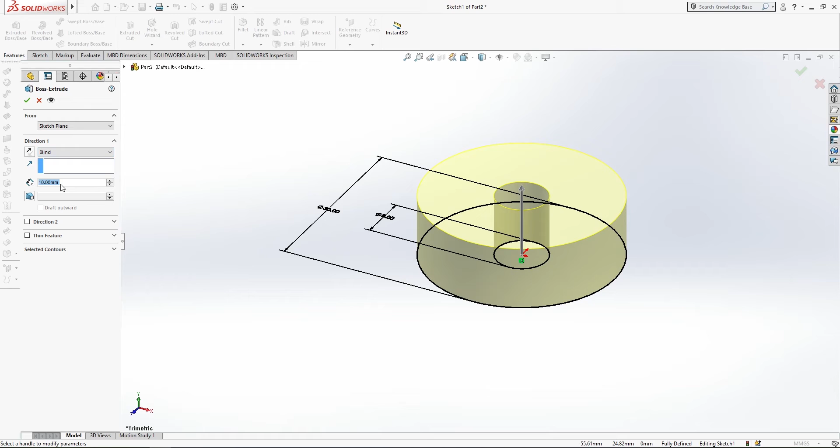And then go to features and select the boss extrude and extrude the sketch into 10 mm. And now we are done with our base.

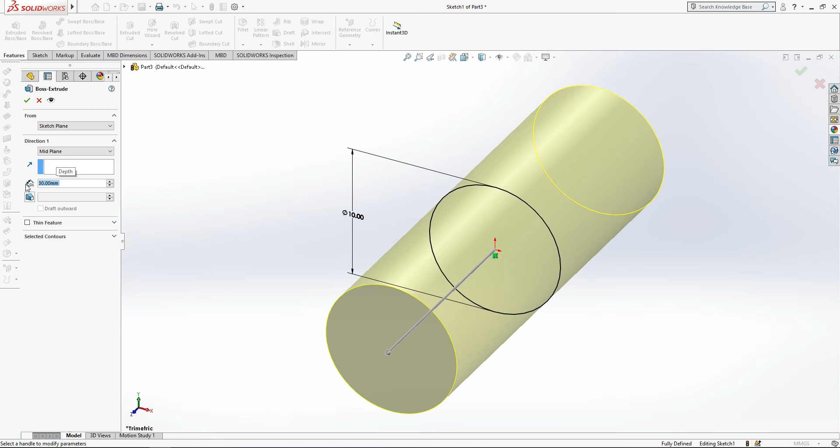Next, we are going to do the cam shaft. Select the front plane, sketch, and create a circle with a diameter of 10 mm. Now, go to features, select the boss extrude, choose the mid plane, and extrude by 30 mm. Now we are done with our camshaft.

Now we are going to do the spring. Select the front plane and create a line upwards with the length of 23 mm.

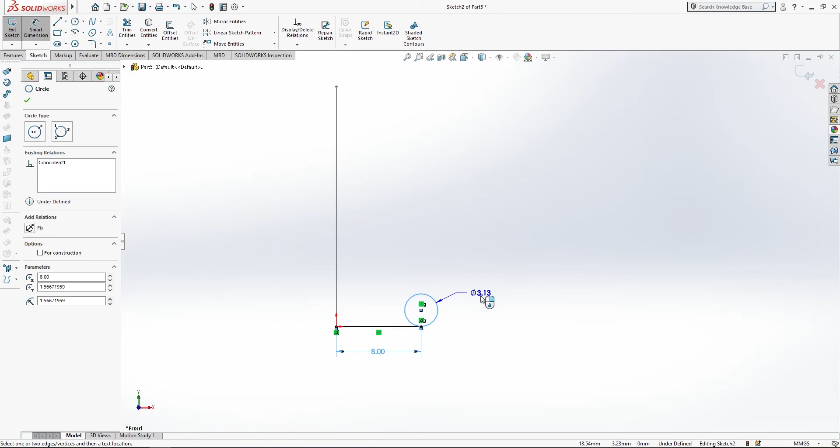Now exit the sketch and select the front plane again and draw a small circle and create a line connecting from the center to the center of the circle. And then add relation, choose the horizontal. We have the dimension of 8 mm for the line and 2.5 mm diameter for the circle. Exit the sketch again.

Select the sketch 2. Go to features, select the sweep boss. For the path, select the line. Make sure that the circle is closed looped. Go to options. Choose the twist value and then revolution and the direction of 4. And now we are done with our spring.

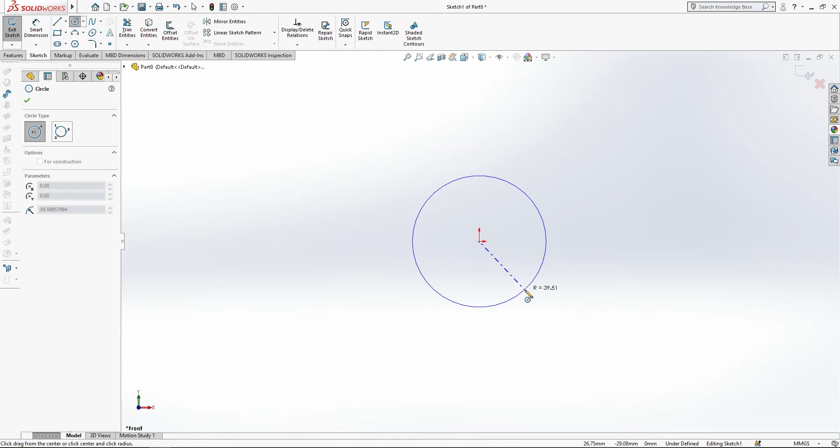For our next part, we're going to do the cam body. Select the front plane, then create a circle with a diameter of 30 mm and another circle inside with a diameter of 10 mm. Then select the center line. Then from the center, create a line upwards with a length of 30 mm. And then draw a circle at the end of the line with a diameter of 12 mm.

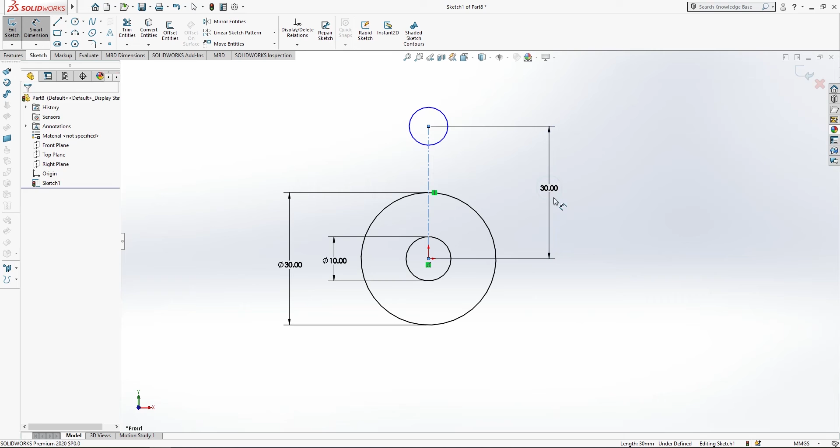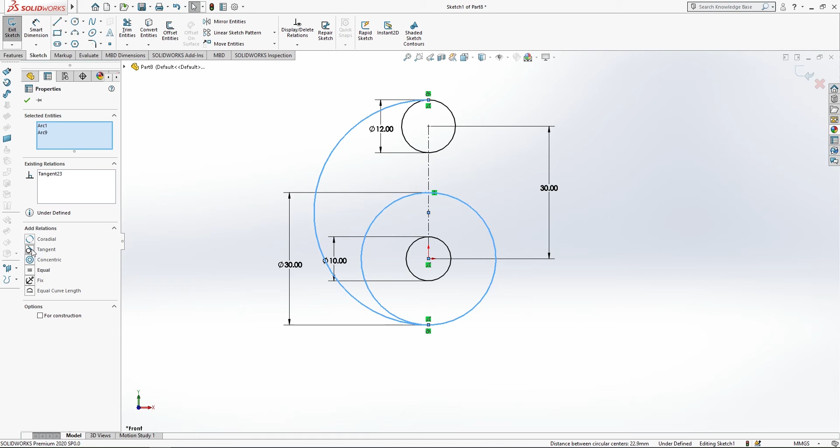Now, choose the 3-point arc and select this circle to this circle and adjust its arc. After that, make the arc and the circle tangent. We can adjust the arc like an egg.

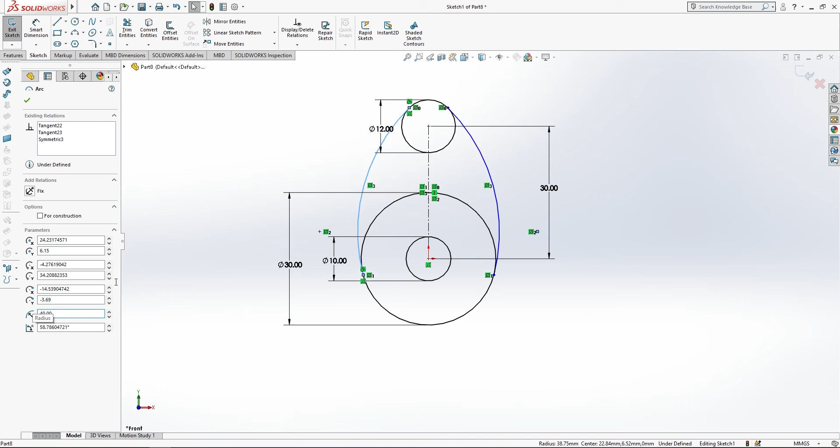And then select the mirror entities and mirror the arc, adjust it, let's say 40, and then trim the circle inside. Now go to Features, select the Boss Extrude, choose the mid-plane, and extrude by 10 mm.

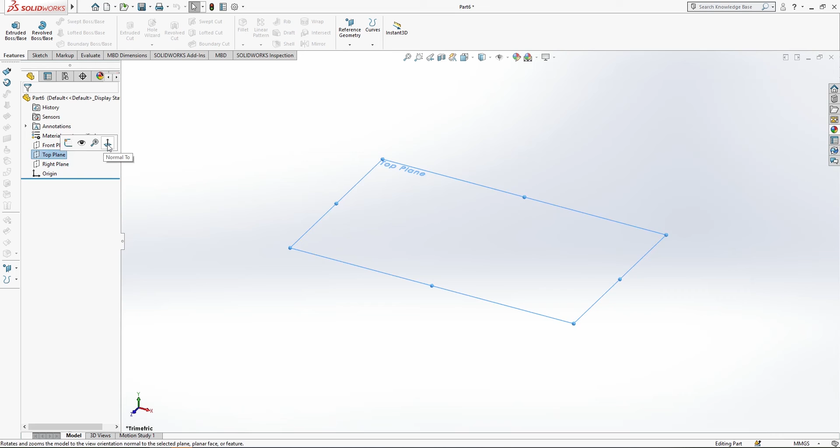Now for our last part, we're going to do the cam piston. Select the top plane, draw a circle with a diameter of 8 mm. Go to Features, select the Boss Extrude and extrude by 50 mm.

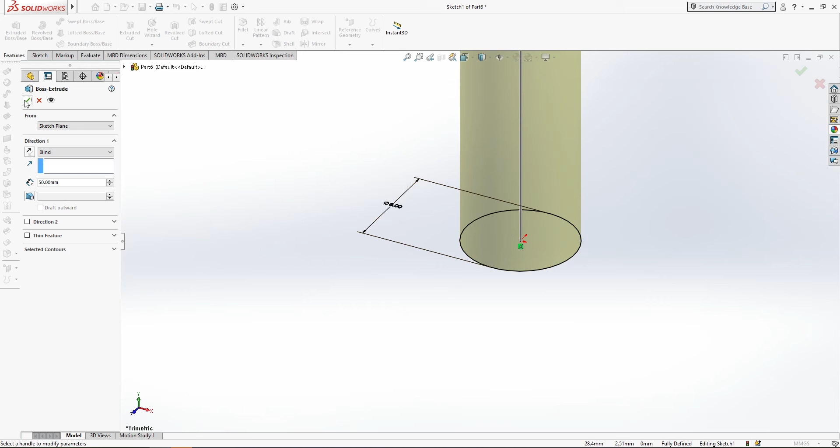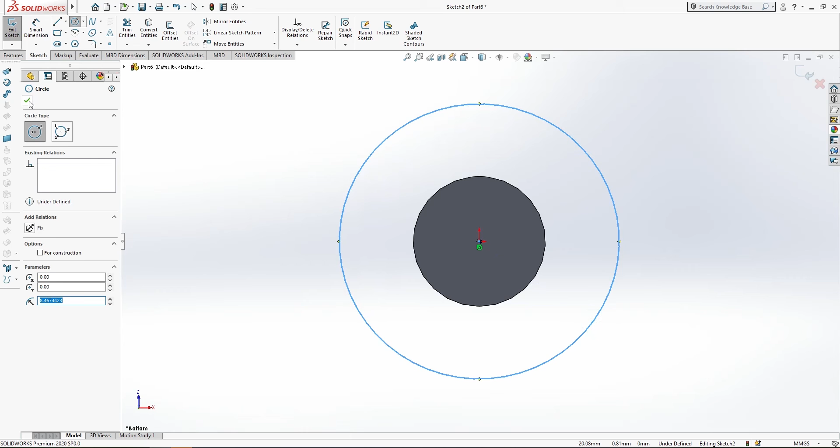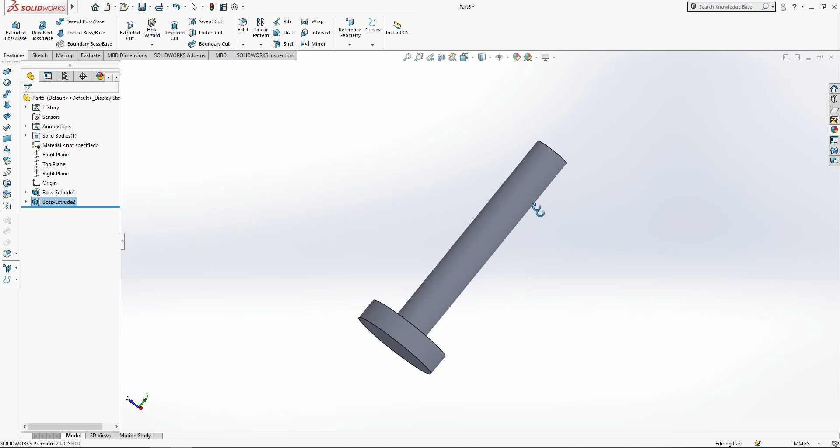After that, select the lower part or the base, and then sketch. Draw a circle with the diameter of 20 mm. Now go to Features again and Boss Extrude and extrude by 5 mm downwards. Select the fillet and fillet the lower part by 2.5 mm.

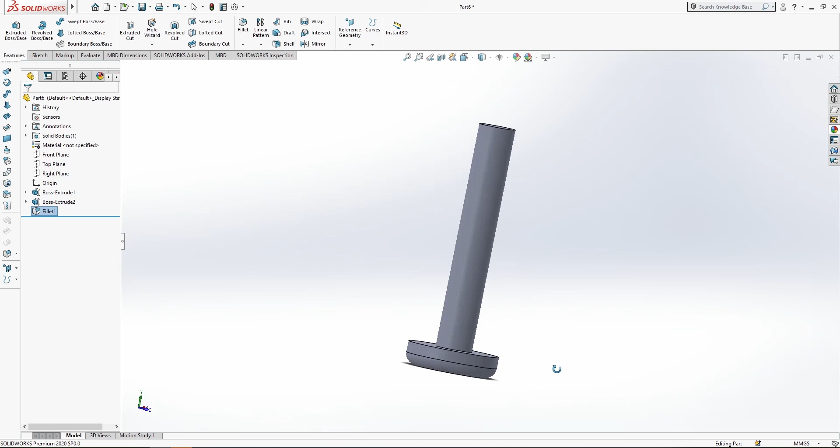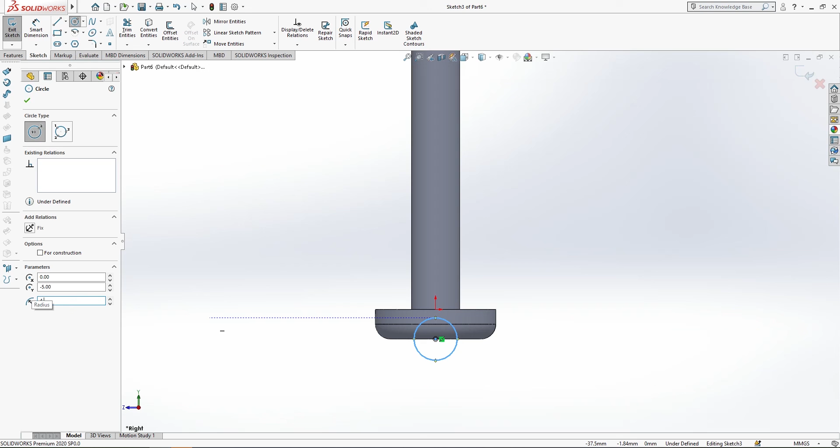Now, select the right plane and sketch. From the lower part, draw a circle with a radius of 4.5 and create a line from the center of the circle horizontally, and then trim the upper part of the circle.

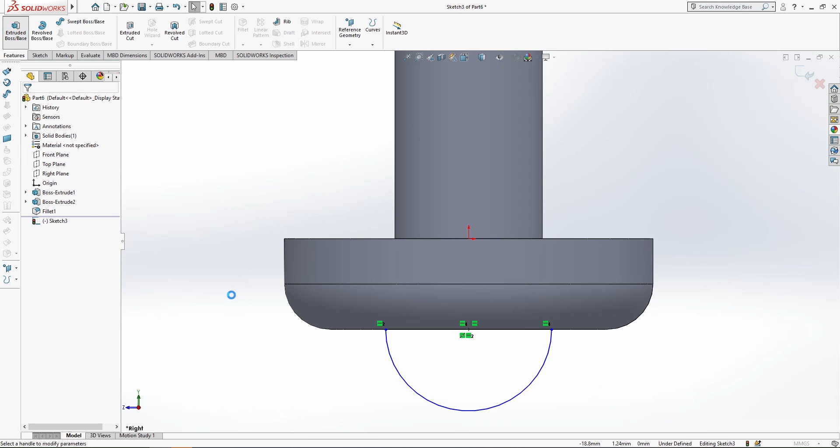Now go to Features again, choose the Boss Extrude, and then select the mid-plane for the direction and extrude by 10 mm. Now we are done with the cam piston and the parts of the cam and follower.